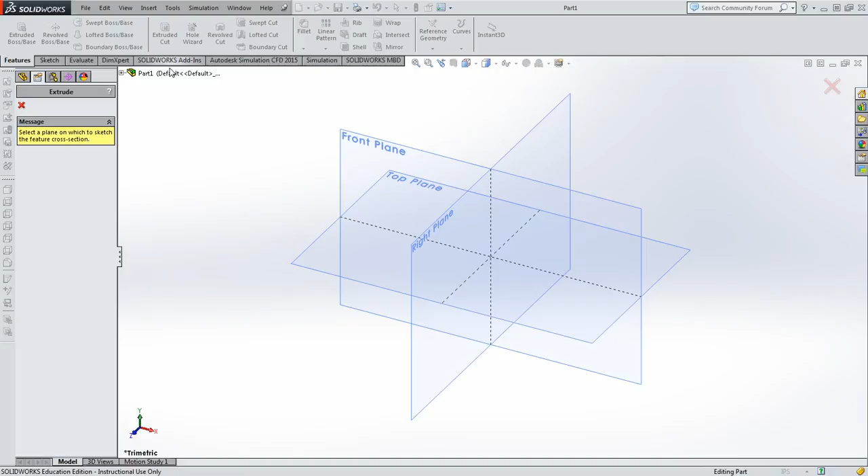First thing we did already in previous lessons was we've selected an extrude boss base, we've chosen the top plane, gone ahead and done a two-corner rectangle, snapping onto the origin and dragging to the positive XY quadrant.

We then smart dimensioned this to be 5 inches. This is a good opportunity to check to see if you are actually using inches. So make sure it says IN here. If it doesn't, at the very bottom here, you can change your unit. Then go back here and change these to 5. Let's confirm.

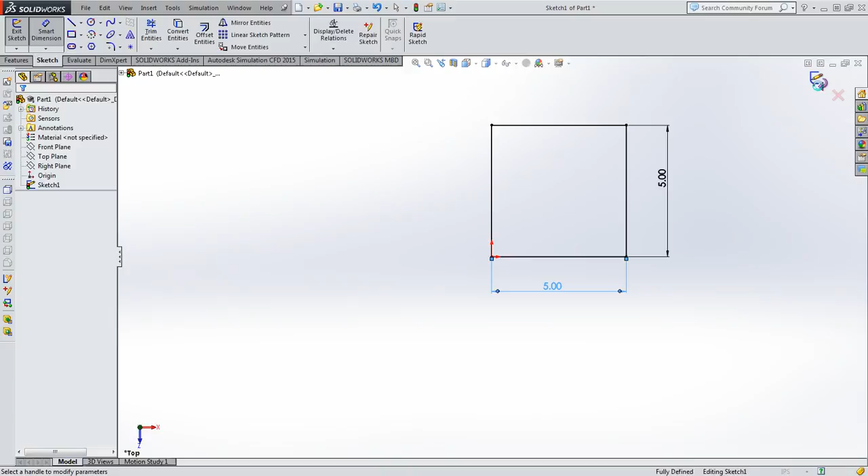Remember not to click X. If you clicked X, we would discard everything we've done and have to start over. So over here on the feature manager, you're going to press 5, select 5 inches. You can zoom out to preview. If you like this, and this is exactly what you intend, you can click the green check, or you can press Enter on the keyboard.

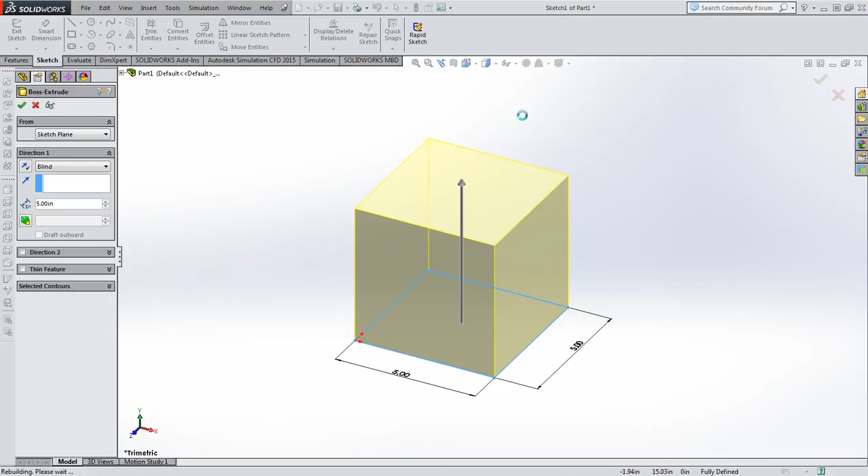Okay, we have the cube where we're starting our new content. This is the orbit tool. Once again, I'm pushing the wheel mouse in and rotating. I've gone over this in previous lessons. To hit the space bar, I can view this in isometric, or have it show me the two-dimensional front, side, back, left, top, bottom.

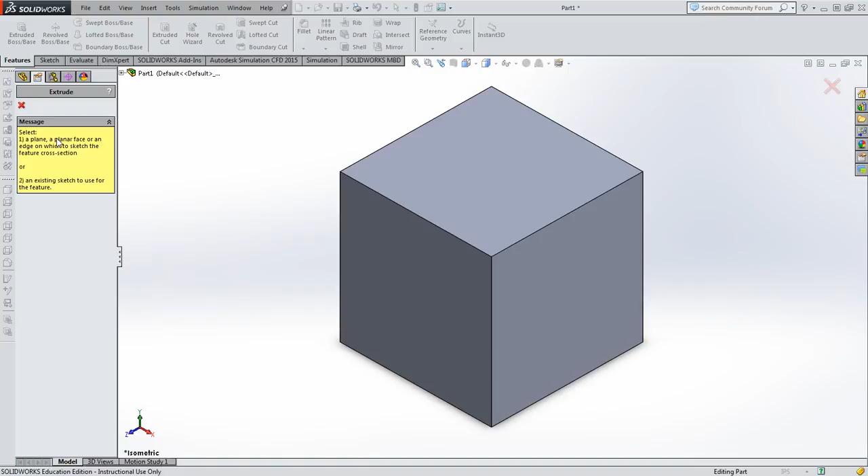So what we're going to do is we're going to look at an isometric. I know that this is the top. We're going to do the extrude cut operation. At this point, we're using a three-dimensional feature, and it's asking us to select a planar face of which we're going to cut. We're going to cut the top, so we're going to click this.

Now that I've selected this, if you notice the sketch tools have now been activated. We'll grab a two-corner rectangle, and we're going to snap to the front corner. We're going to just drag outwards. Now we've snapped to this corner. This sketch cannot come off this corner, but we can dimension the sides of this square.

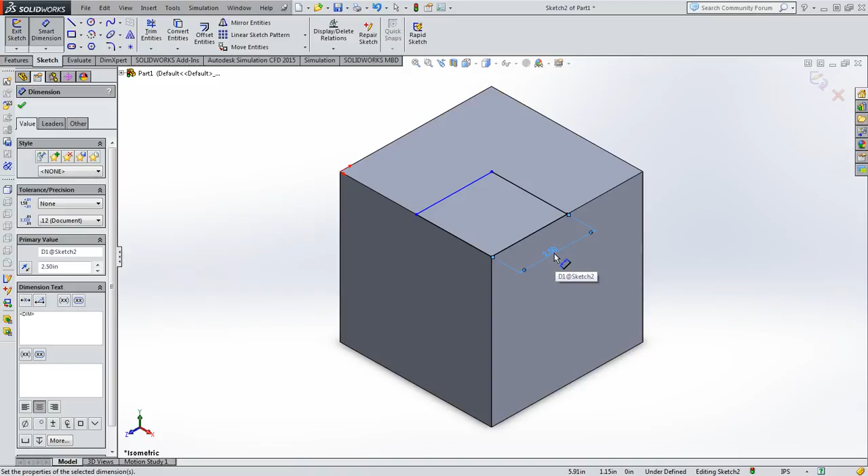Since this is a 5-inch cube, we're going to take 5 and cut that in half. We could put 2.5 because we know that's half of 5, or we can use this as a calculator. So if I did 5 divided by 2, press Enter, I have my 2.50. You can use the dimension line here as a calculator if you can't calculate specific calculations in your head. I'm going to put in 2.5 natively, press Enter. Now we have a 2.5 by 2.5 square.

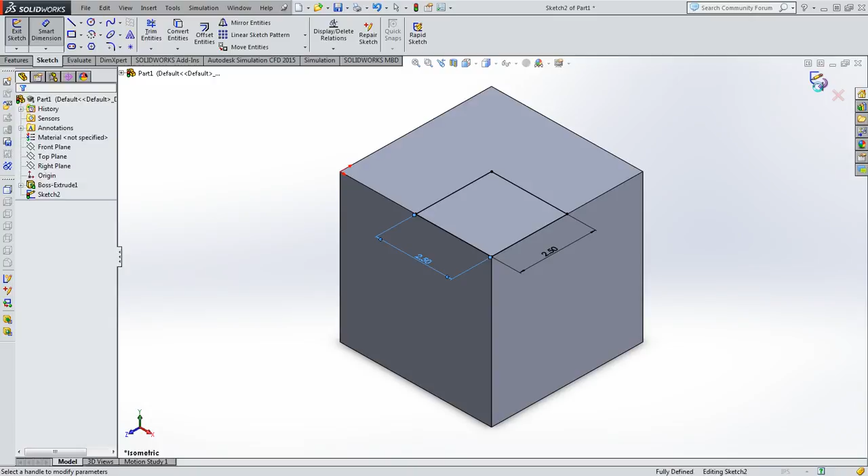Now we're doing the exact opposite that we did initially to make the cube. Instead of extruding upwards, we are going to extrude downwards and remove material. So when I click the confirmation corner, it's going to ask me how far down do I want to cut. It remembers the last value I entered, 5. I don't want to cut all the way through, I want to go halfway through. So I'm going to do 2.5 and press Enter. It gives me a preview over here. I'm going to click the green check, and now that material is gone.

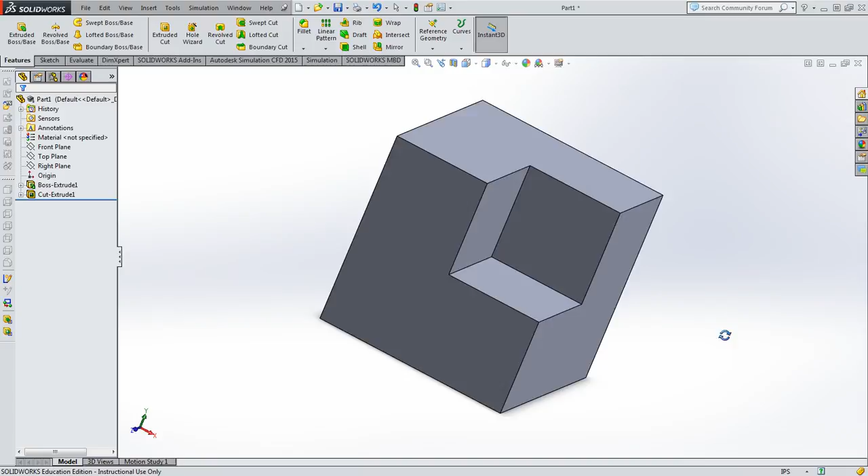We're going to use this model to create a detailed 3-view orthographic projection drawing in the next video. So at this point, save as, and you want to save this object as cut cube. Make sure you put it in the proper location that I've told you in previous lessons.